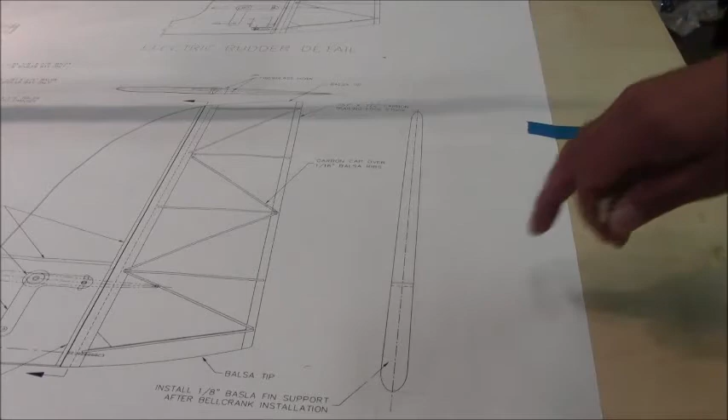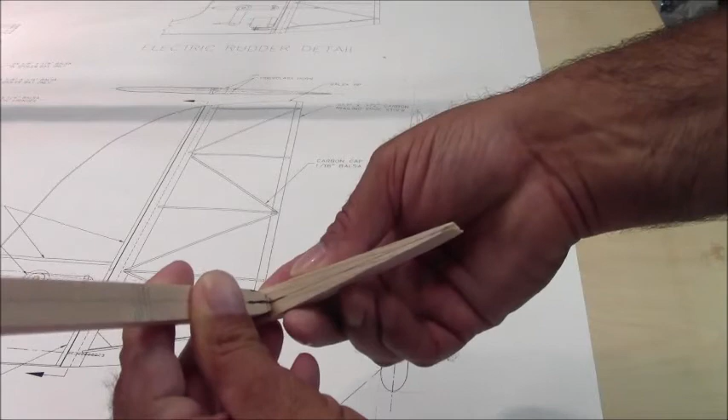Thought I would show you how I plan on making the difference up at the spar in the top tip. Remember, we had that gap of material we needed to remove from this point to keep center line, and this is basically what I'm doing. You can see the amount of material that needs to be removed to keep those lined up.

So you can see where the cheek cuts on both sides need to be, keeping center line in play. I've marked the cheek cuts, and now I'll slowly, keeping center line in play, take off a small amount each time since it's balsa wood, until I get down to that profile. At that point, the rest would be hand sanding and we should be good to go.

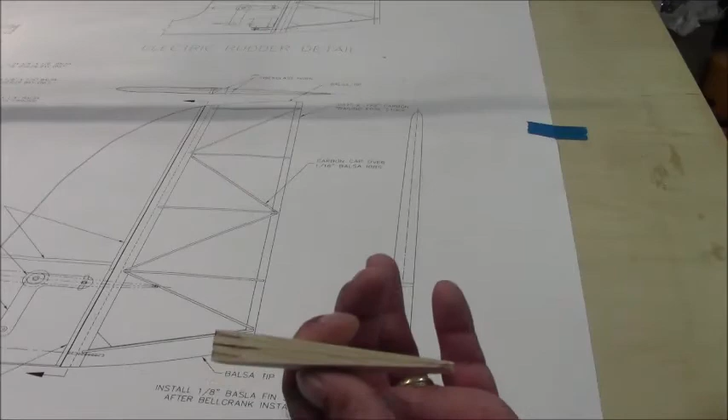Okay, this worked out really well. Everything went, luckily, as I planned it, so I'm tickled to death. Let me show you what we ended up with.

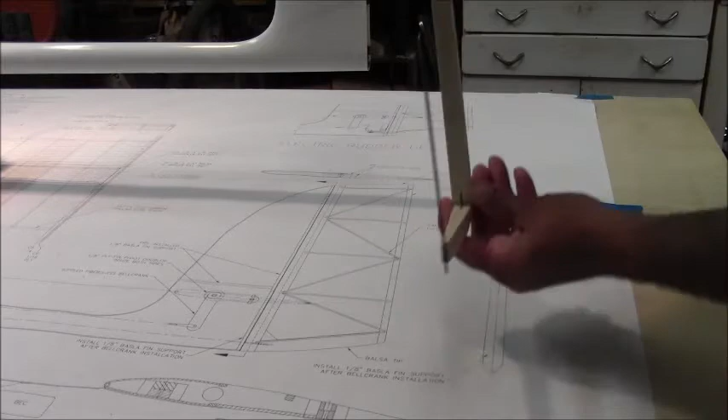I tried to mark these lines a little heavier so you guys could see them in the corners. But because we stayed true to the center line all the way around the piece, it's nice and straight. That's a nice straight piece, and it's going to be a nice straight rudder.

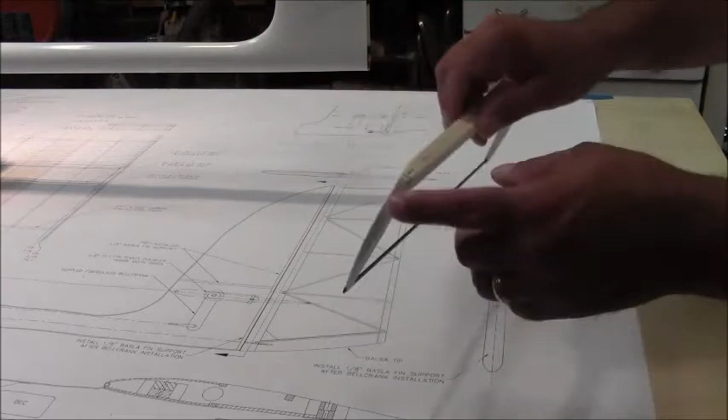As far as the carving is concerned, once you've gotten these glued together, all you really need to do is shape down to the edges, keeping the balsa spar as your guide. So as long as you keep the balsa spar as your guide, you're good to go. It's basically just rounding over, not a whole lot of process to it.

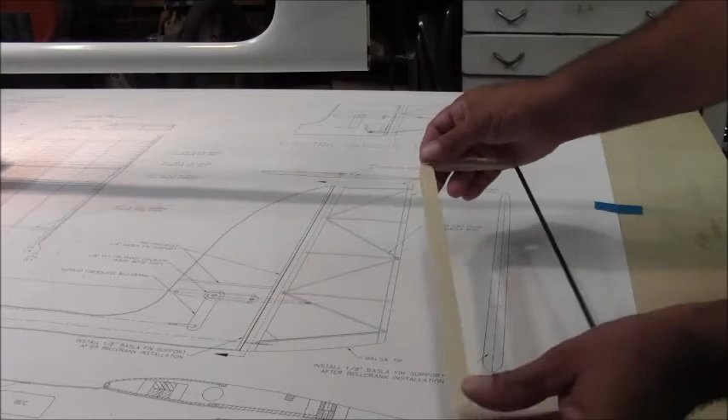I've glued these on, the balsa spars and the tips, but I have not glued on the carbon spar yet. It lines up perfectly with the plans, so I'm tickled with that. Now it's time to start on the ribs and the gussets, and we'll be done with this in no time.

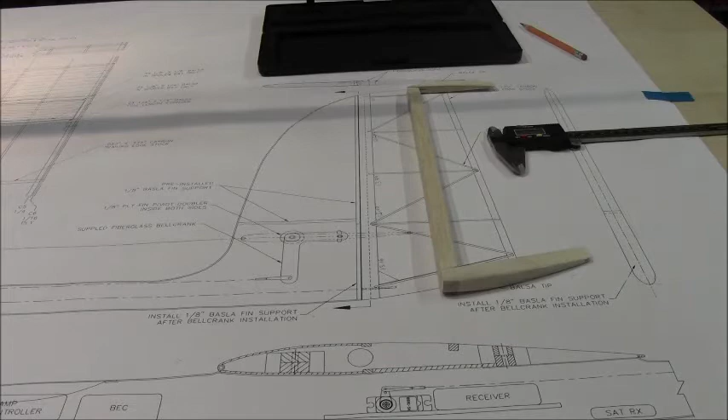Thought I'd better go over something really quick so we're all on the same page. The next step is to make the ribs, and there's probably different ways to do it. This is the way I'm going to do it.

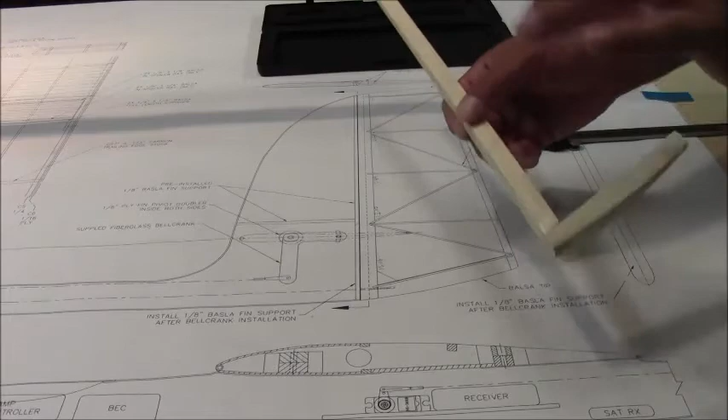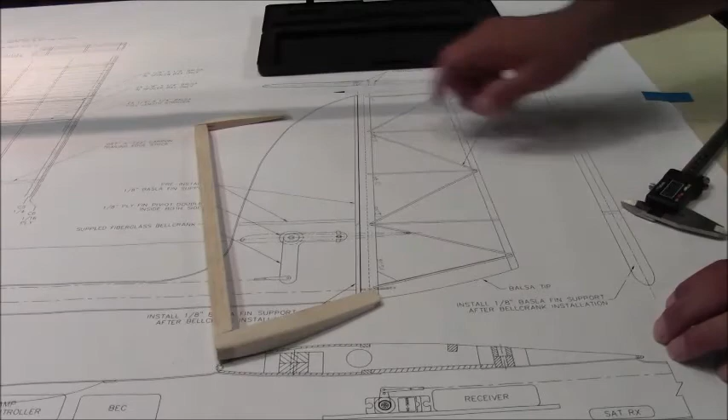The issue we have is the spar is tapered, it's not the same thickness at the bottom as it is at the top, which means as the ribs go on this piece, the back thickness of those ribs is going to change. So what I elected to do was take a pair of calipers, and at each section where there was a rib, I recorded that measurement, so I know what the thickness of the back of that rib needs to be. I wrote those down here on the plans, as you can see, so I've got the reference and can come back to that as I'm building these individual ribs. That's how I'm going to control the angle as it comes down.

Okay, ladies and gentlemen, what do you think? I'm pretty much done. I still have to put the control surfaces on, which is no big deal, but other than that, I think I'm pretty much done. Everything went great, it's exactly as per the plan, other than I did the joint a little bit different.

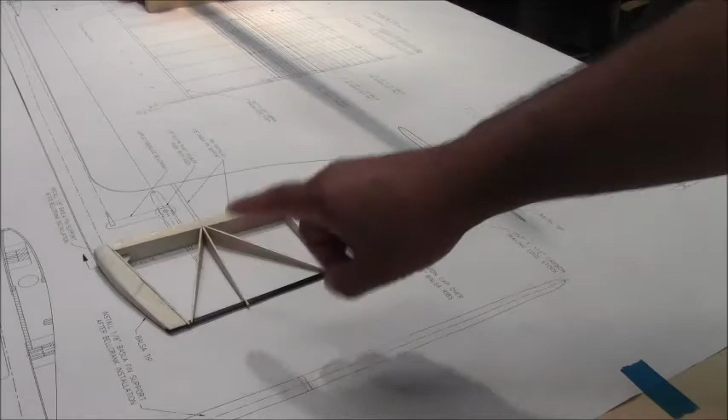The reason I did that was because I felt it would make the rib process a little easier, basically making a big C and using the spar as kind of an accordion to be able to put those in. So I had all of those in place before I glued anything up and got all the lines to match the way I needed by being able to remove that piece. So everything went great.

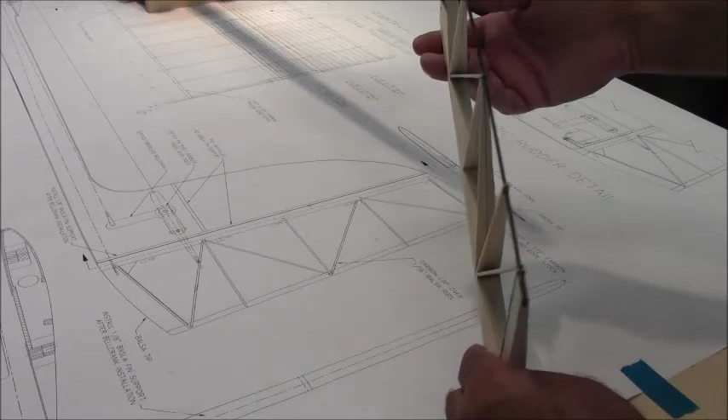It's nice and straight. I did mark center line of each rib as I made them, and I matched those to the inside of the spar, and it came out very, very nice and straight, and feels very sturdy. It should be good shape. It matches the contour of the fuselage just the way it should, so I'm very happy.

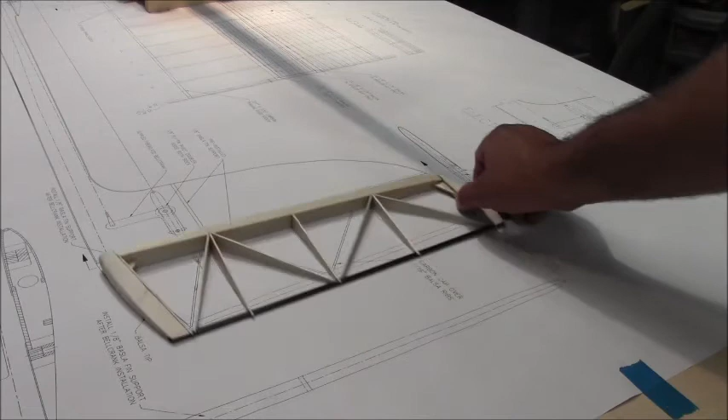At this point, we are on to the carbon capping, so onward and upward.